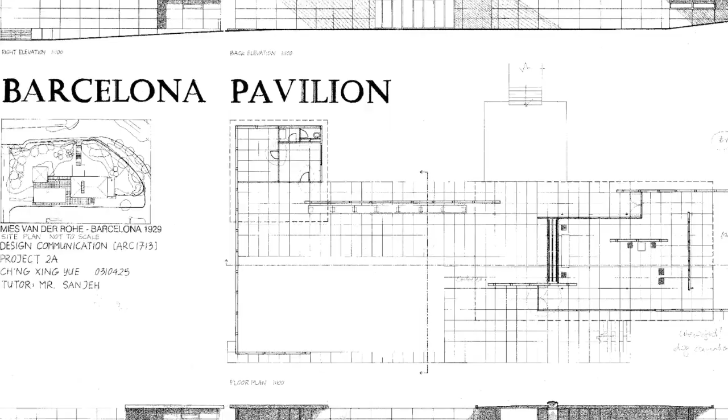After several architectural triumphs in Germany, Mies was commissioned to design the German Pavilion for this exposition in Barcelona. The pavilion was intended to be the face of the German section that would host King Alfonso XIII of Spain and German officials on the inauguration of the exposition.

Unlike other projects, Mies understood his pavilion simply as a building and nothing more. It would not house art or sculpture. Rather, the pavilion would be a place of tranquility and escape from the expo, in effect transforming the pavilion into an inhabitable sculpture itself.

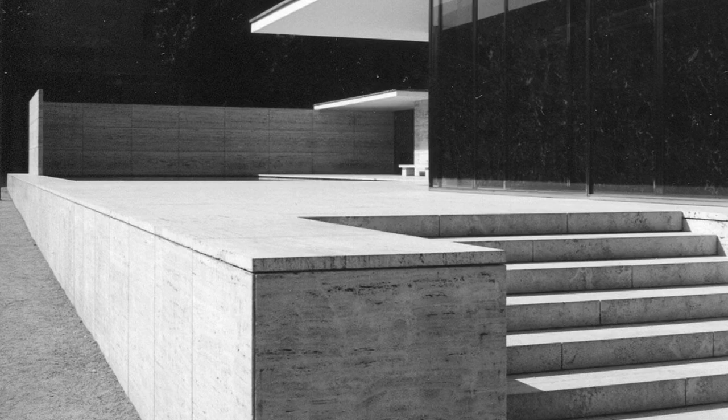Situated at the foot of the National Art Museum of Catalonia and Montjuïc, the Barcelona Pavilion resides on a narrow site in a quiet, tucked-away corner secluded from the bustling city streets of Barcelona. Raised on a plinth of travertine, the Barcelona Pavilion separates itself from its context, creating atmospheric and experiential effects that seem to occur in a vacuum that dissolves all consciousness of the surrounding city.

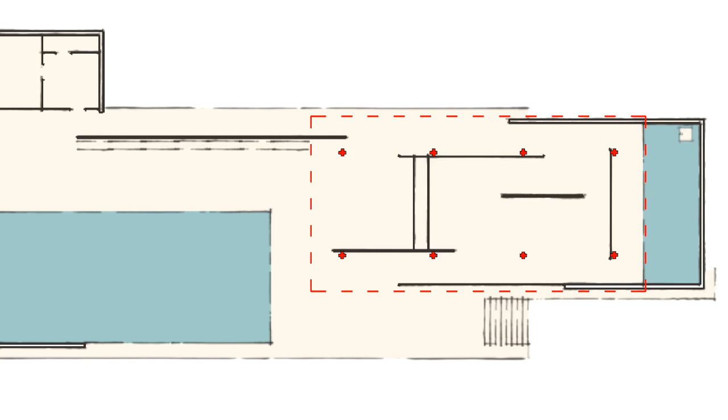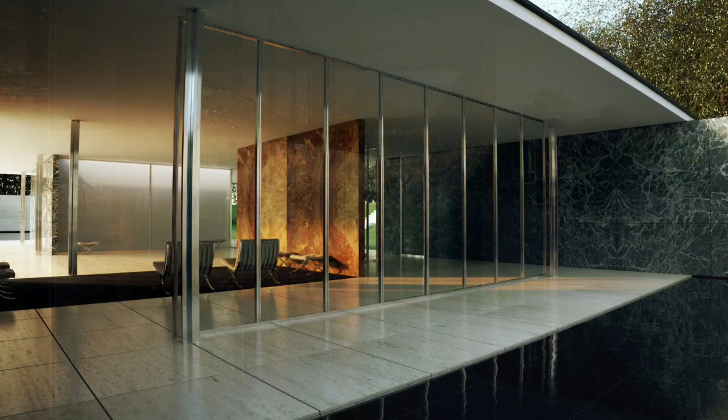The pavilion's design is based on a formulaic grid system developed by Mies that not only serves as a pattern for the travertine pavers, but it also serves as an underlying framework that the wall systems work within. By raising the pavilion on a plinth in conjunction with the narrow profile of the site, the Barcelona Pavilion has a low horizontal orientation that is accentuated by the low flat roof that appears to float over both the interior as well as the exterior.

The low stature of the building narrows the visitor's line of vision, forcing one to adjust to the views framed by Mies. When walking up onto the plinth, one is forced under the low roof plane that captures the adjacent outdoor court, as well as the interior moments that induce circulation throughout the pavilion.

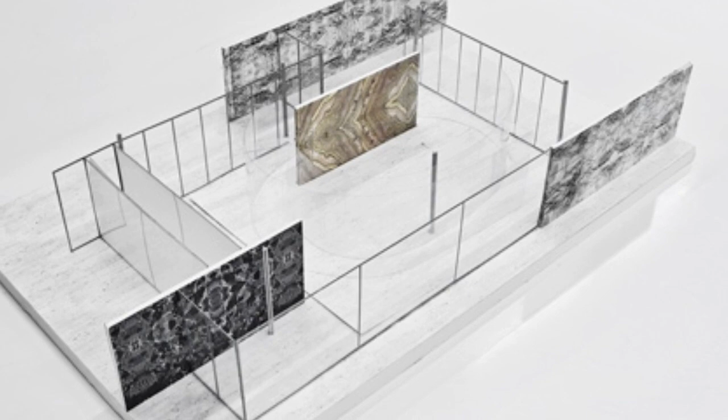The interior consists of offset wall planes that work with the low roof plane to encourage movement, as well as activate Mies's architectural promenade, where framed views would induce movement through the narrow passage that would open into a large volume. This cyclical process of moving throughout the pavilion sets in motion a process of discovery and rediscovery during one's experience, always offering up new perspectives and details that were previously unseen.

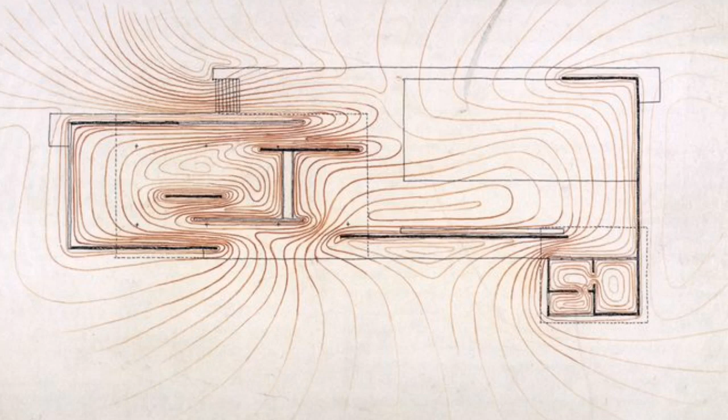All of this further reassures Mies's understanding of the pavilion as just a space and nothing more, because if we were to see it as a house, for example, the conflicting nature of the quest for private space versus the open-plan, free-moving space of the pavilion would turn that building into the house you can't get in, given that every time you follow the passages you think are getting you into an inside space, they just get you outside again.

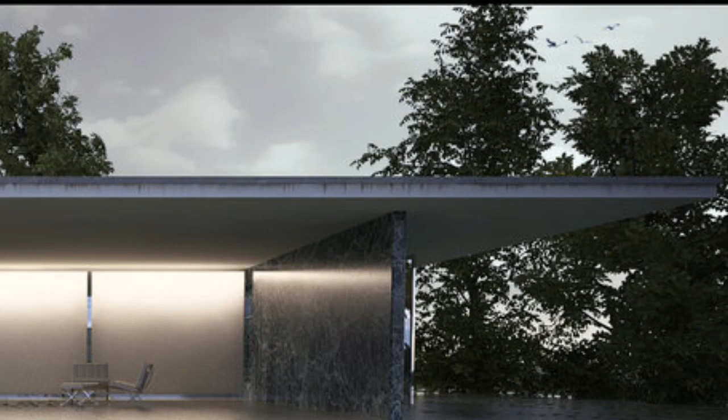Every aspect of the Barcelona Pavilion has architectural significance that can be seen at the advent of modern architecture in the 20th century. However, one of the most important aspects of the pavilion is the roof. The low profile of the roof appears in elevation as a floating plane above the interior volume. The appearance of floating gives the volume a sense of weightlessness that fluctuates between the enclosure and canopy.

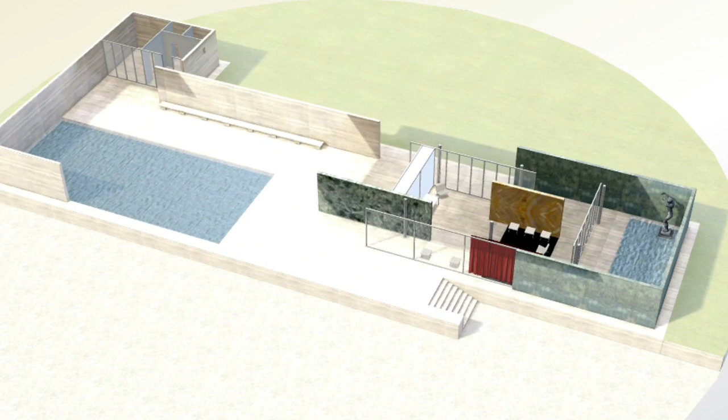In addition to the design, the materials are what give the Barcelona Pavilion its true architectural essence, as well as the ethereal and experiential qualities that the pavilion embodies, because as Mies said, God is in the details. Case in point, when asked where were Germany's colors in the pavilion, Mies pointed at the carpet for the black, the curtains for the red, and the marble wall for the yellow. Details hidden to a careless eye, but gently placed to identify Germany.

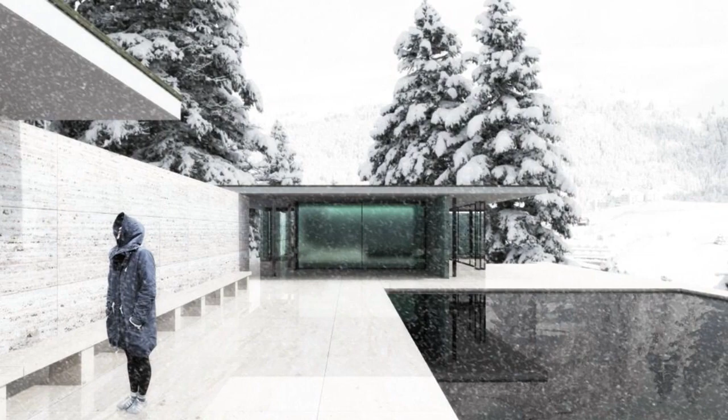Mies went on to great heights. Alongside Le Corbusier, Frank Lloyd Wright, and Alvar Aalto, he has long been considered one of the masters of 20th century modern architecture. Since then, young architects have been adopting his rational architecture around the world, spreading the message that, as he famously said, less is more.